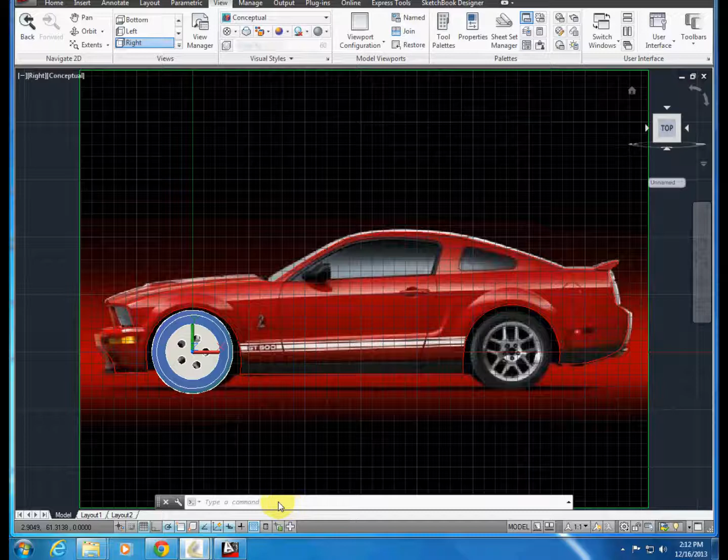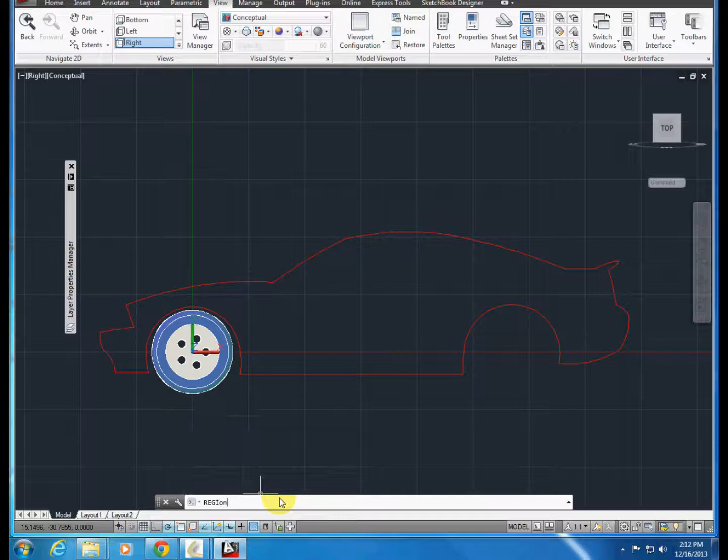First thing we'll do is open up our layers and get the side view, and we'll select each of the line items we've made. We'll type in region, then select everything here, and if all the lines are put together, you will see a solid object.

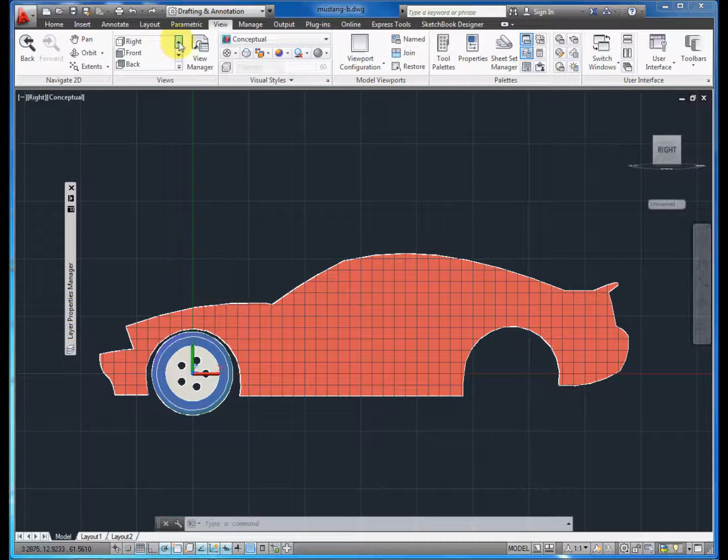In the view, we want to make sure we're seeing this in conceptual or shaded view, then look at it in 3 dimensions. Now the reason this worked is that all the lines were on one plane. If you have objects that are not on the same plane, it doesn't work.

You don't need to move this, but I'm moving it so I can get an idea of what it would look like. You're probably better off moving the wheel than the side of the vehicle, but you want to make sure you know what the right side and left side of the vehicle is in relationship to the tire and the wheel.

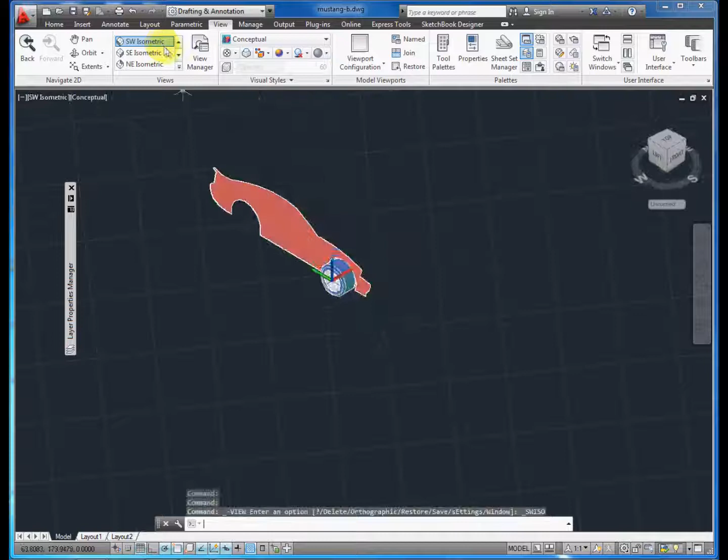We want to make sure the midpoint is selected. What we're going to do is make the width of this vehicle. I'm going to draw a line, and it's going to snap near the rear of the car, and in this case I'm going to type in 60 inches. Now you can always scale the wheels in the vehicle to make it fit.

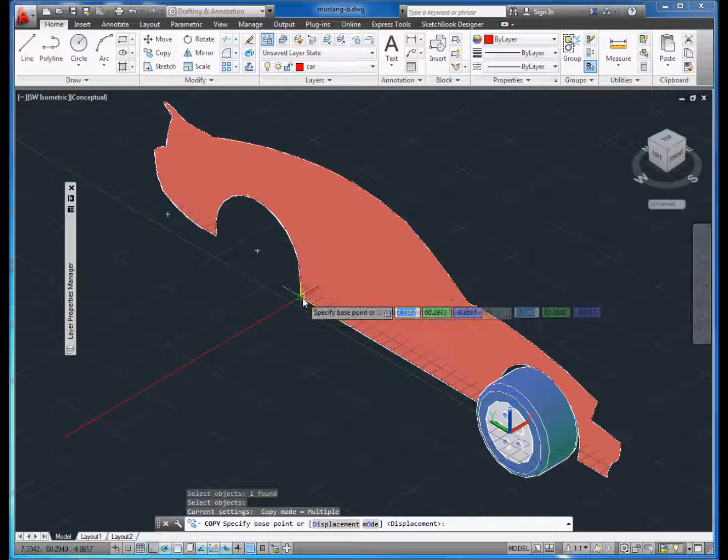So now what I'm going to do is copy that side of the car that I regioned, and I'll simply hit copy. Every time I select an area where it's going to go, it'll snap to it. The first thing it asked me was to select where I wanted to copy it from, and then it just pastes it there.

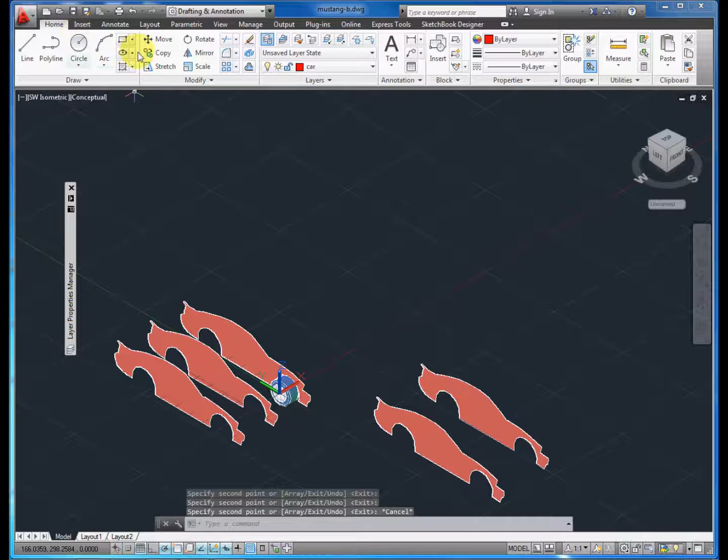So I have a couple extra here. You really only need one extra in this case, but you should see 3. The most important thing is you see 3 of those objects, and they should be in a pancake - they must be in a separate point along the axis.

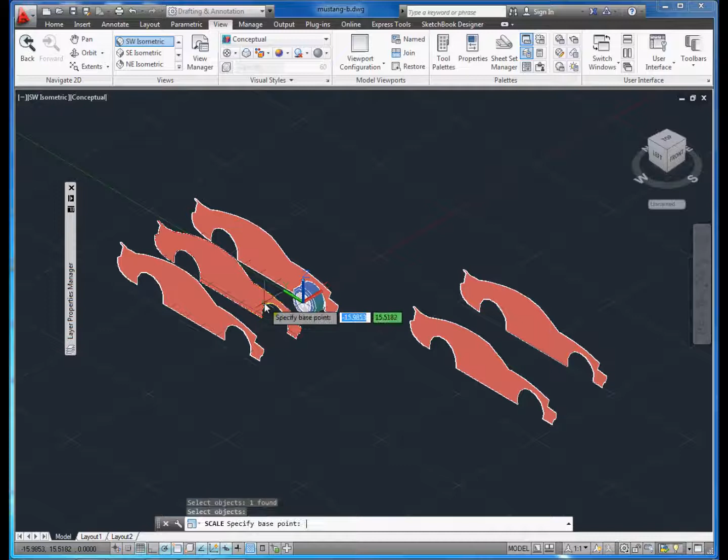Then what we're going to do, it's really important, is scale the center of the cars that have been regioned. I'll select it from that base point, press enter, and scale it 1.1, so it's a little over 100%. You really don't want to get too much more than that.

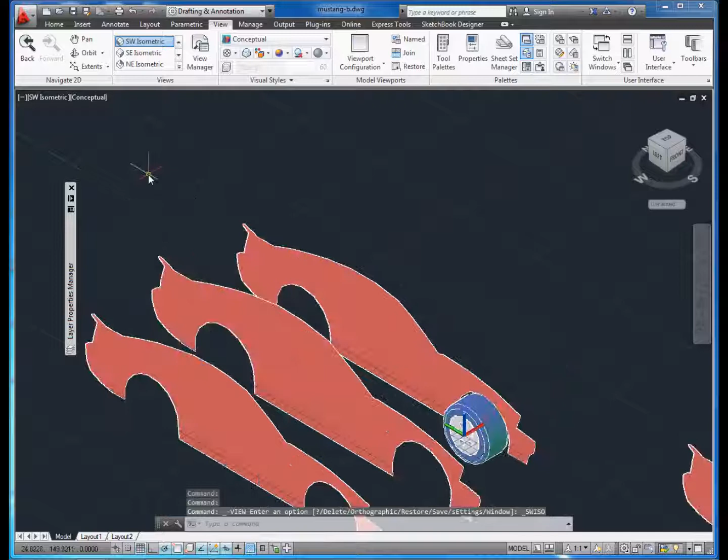That might actually be a little bit too much, but you'll notice it's bigger than the objects on the left and the right of it. Make sure you're looking at this 3-dimensionally, otherwise this all won't work.

Now what I'm going to do is explode, so I'm going to unregion these objects. There are icons in the ribbon you can use, but you can just type in explode, and that frees everything of its parameters. So now they're back to the individual lines.

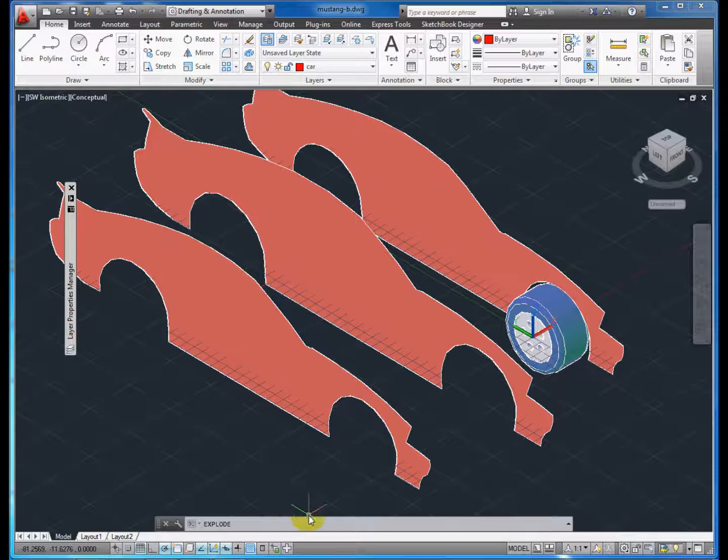So now what we're going to do is make a single object out of all 3 of these lofted objects in these points.

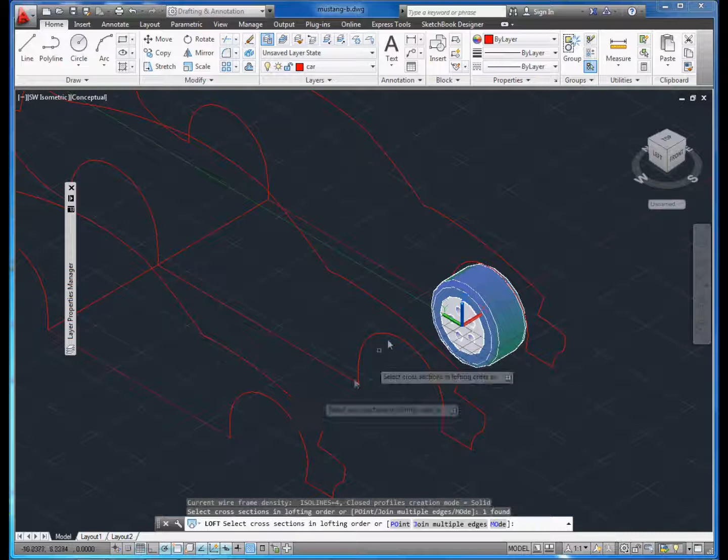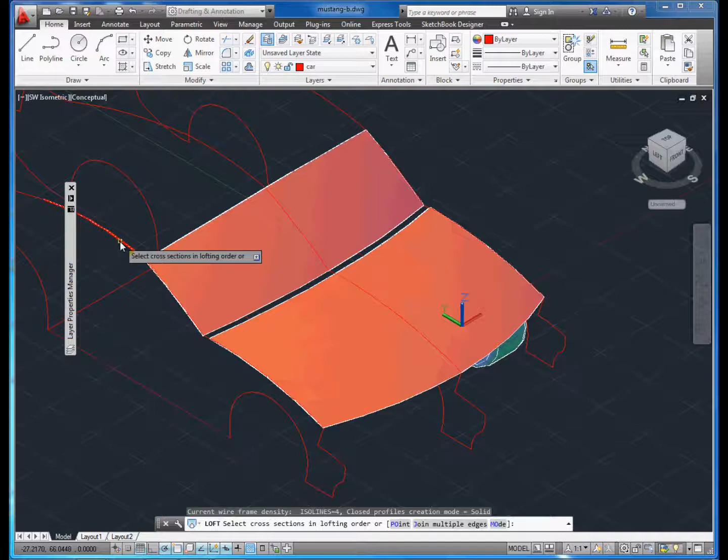So what I do is type in loft, and select in sequence the items I want to see. I press loft and hit enter 3 times. The first 2 are the loft; the third one actually just starts the entire sequence of the loft again. So you type in loft, then enter 3 times - the first 2 will do the loft, and the third time you hit enter, it just redoes the loft command, or whatever the previous command was.

So I have this. Now, you don't need to do this right now, but I'm just showing you with a glass - that window - that's why I wanted that to be one piece, because that is going to be the glass. In the rear, this is also going to be the glass. I'll press enter 2 times, and if I want to continue on, I just press it 2 more times.

So let's go ahead and make that glass. I select the object, which is the rear window.

And then in the layer command, you just click onto the glass, and it should just make the glass. Now the thing is, we obviously want to select off the glass as we start the new one. Otherwise, the rear of this car will be glass.

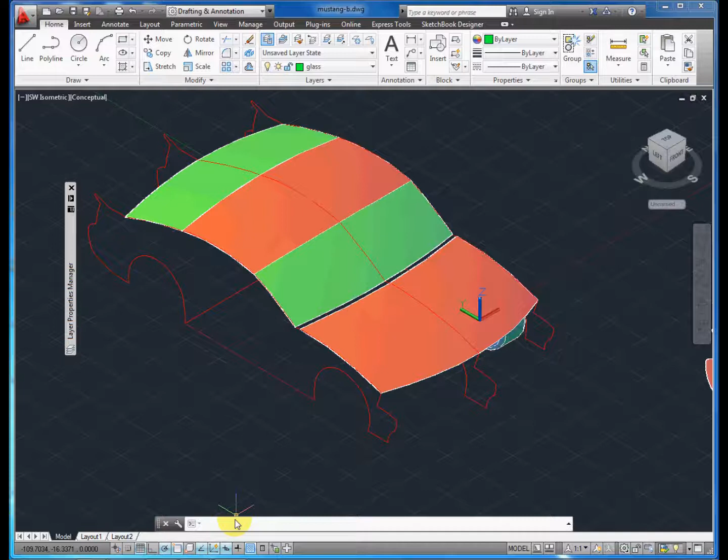But let's go ahead and type in loft again, and select the rear of the car. Now remember, if it's the hood, there's 3 of the hood. If it's the back trunk, 3 of the back trunk in sequence from outside to the middle and to the other side.

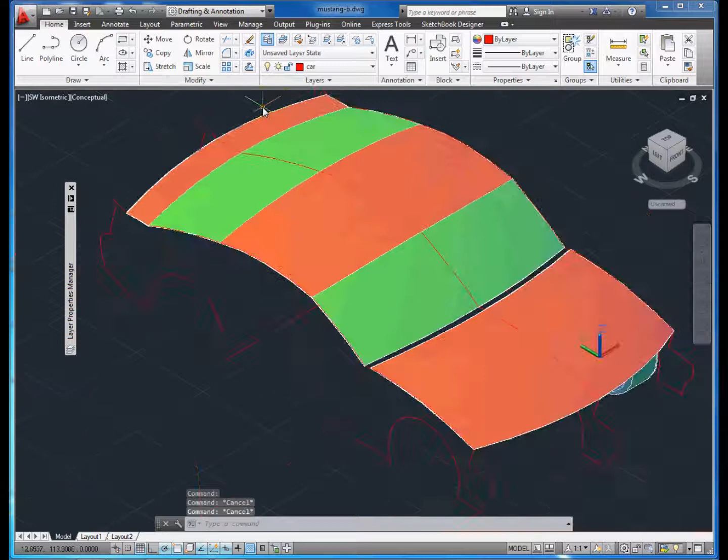This should actually go fairly quickly for you as you start this. You just want to be looking, and I'm going to use the orbit as a great tool to be able to rotate around and look at this. Then I'll go ahead and type in loft again and press enter.

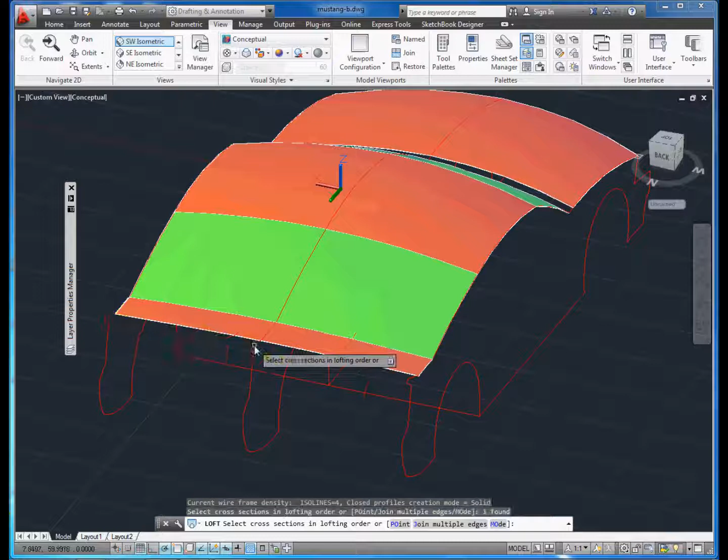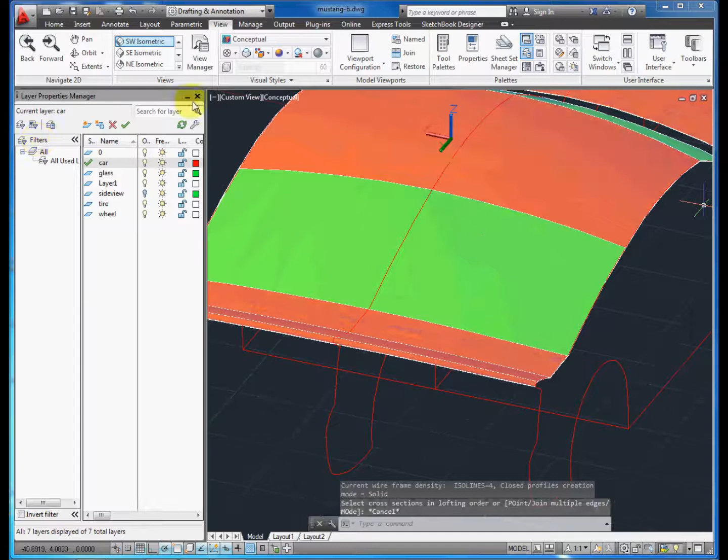Select the objects and then press enter 3 times. You want to inspect it as you go along here. Making sure this is all in the same layer. Then I'm just going to systematically go through this and complete this portion of the project.

So loft 3 times, select the objects, and keep going around. Select loft, press enter, select the 3, and then hit enter 3 times after you're done. Again, you're going to need to be rotating around this object so you get a good vantage point of this.

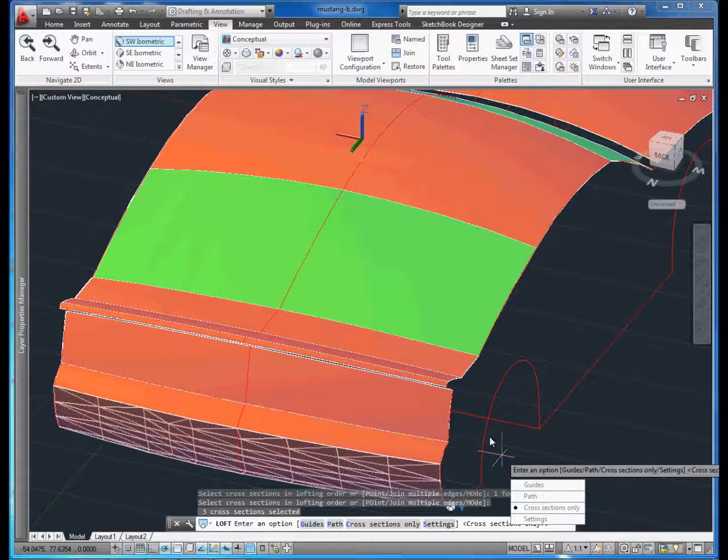One of the things we don't necessarily want to do is loft those wheel wells, for example. If you look at a traditional automobile, those aren't generally going through the entire car. But I do want to do the part of the undercarriage. And looking at this, this is that back of the wing.

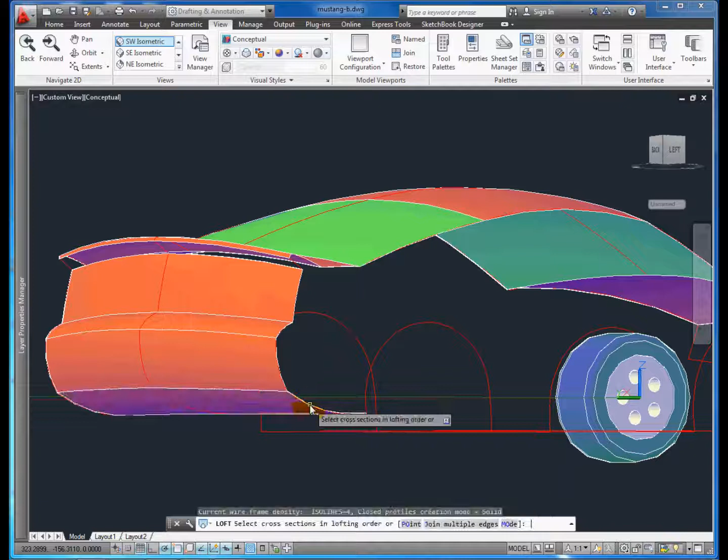The nice thing is the object becomes much more supple. If we had done an extrusion on this, it would just be a straight line. So with the loft command, you might want to play around with it as you go along, because it does give you different types of options.

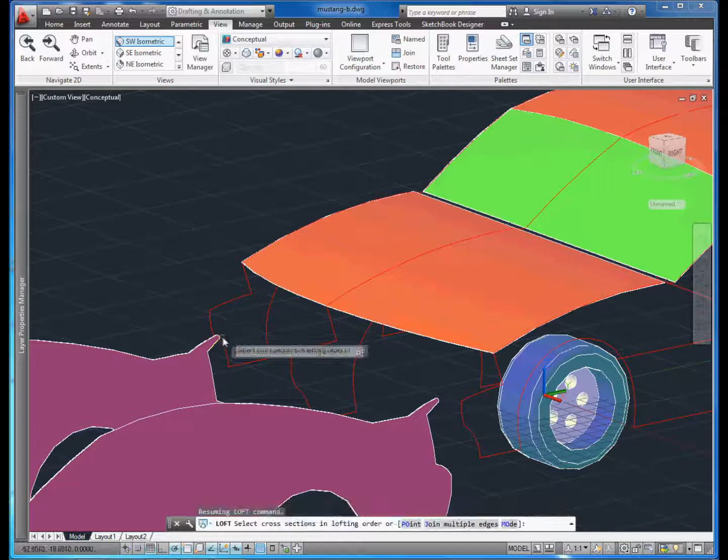I'm just simply scrolling in with my mouse as I do this. And these 2 vehicles are in my way, on 2 sides. I'm just about done with this portion.

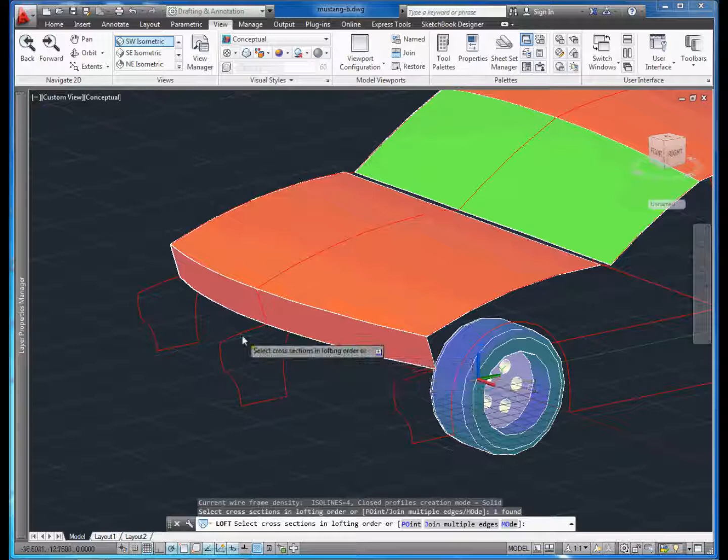I notice the front end is a little big, this bumper, and that's probably because that's where I selected when I selected the portion where I copied, it was more to the rear. But typically the front has a little bit more bow than the rear of the car.

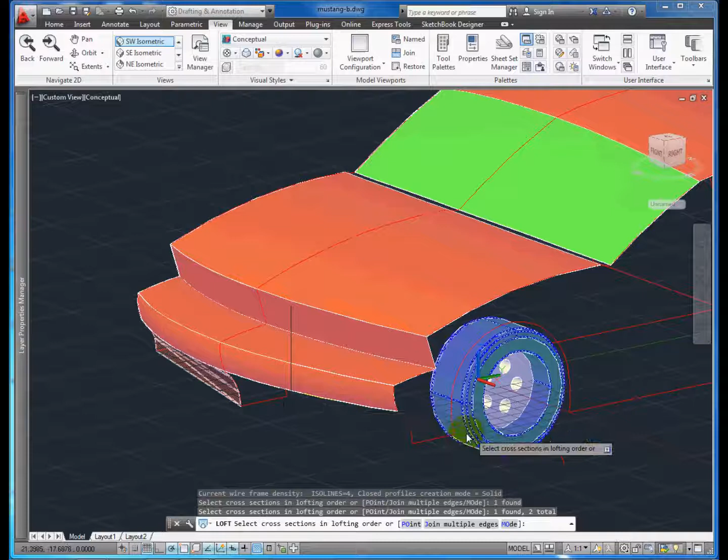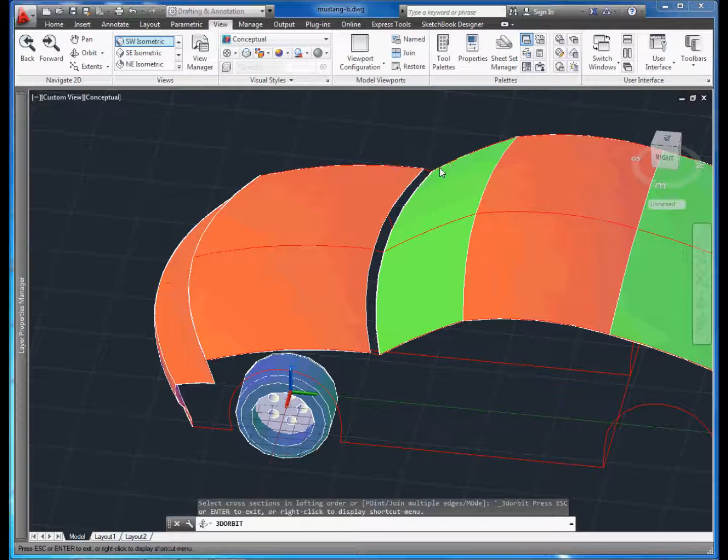All right, so inspect it over, make sure that the vehicle has been regioned. Now what we want to do is transition here to the side of the car after we get this last little piece here. Goes very quickly.

All right, so let's get back to our view here. Go to the right view. All right, now you can see it's looking more three-dimensional. All right, so there's a couple things we're going to need to do here.

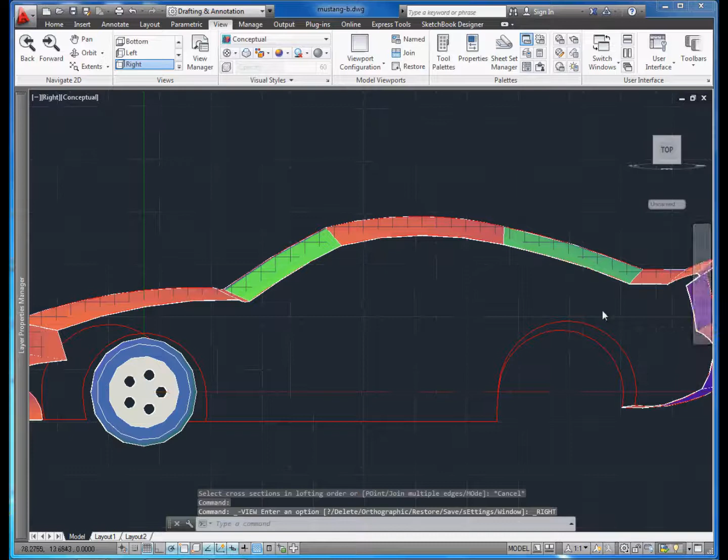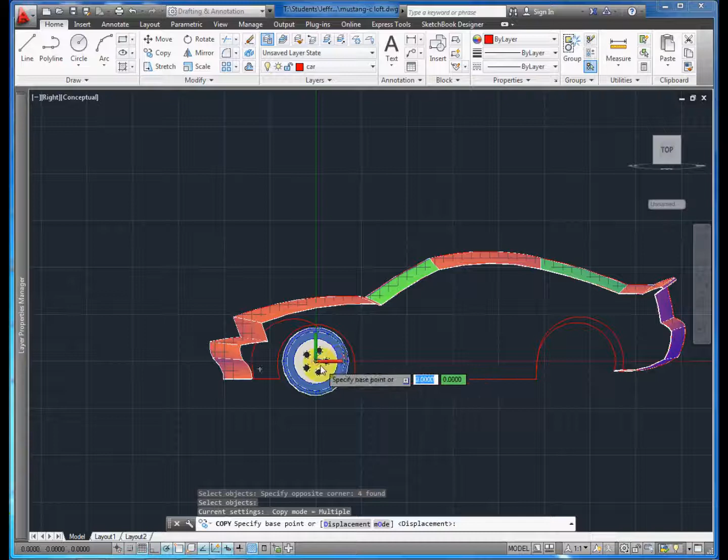So let's first of all copy this wheel. I type in copy, and I want to select it in the center of that wheel well. And if you notice as I move it, if the settings are done correctly, you'll see a line that it moves across, just straight across.

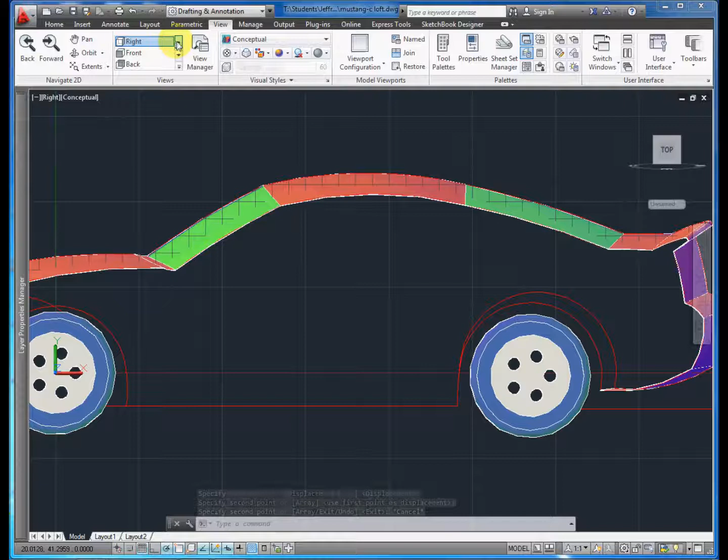You can also, if that's not working, with the wheel wells, it'll show you the center of it, but it's usually easiest to just go straight across. That way it doesn't snap to inadvertently. All right, so we can see it's not exactly where we wanted.

I'll just simply type in move, go from the bottom left. If you go from the bottom left up, it'll select the pieces, the components that you haven't quite hit. So I go from the bottom up, press enter, and then I can move it in. I have to be very careful with a snap line because I don't want to be snapping this to an area where I don't want it to be.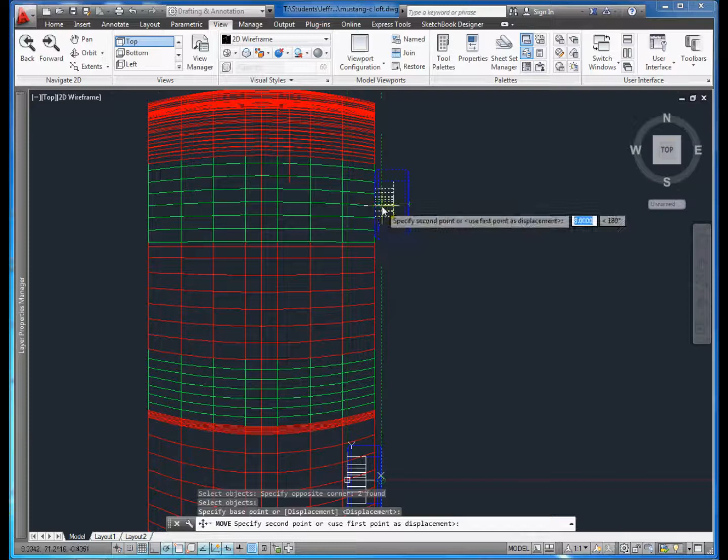All right, so that looks pretty good. Okay, so inspect the car. It should be three-dimensional, and we've finished lofting the vehicle.

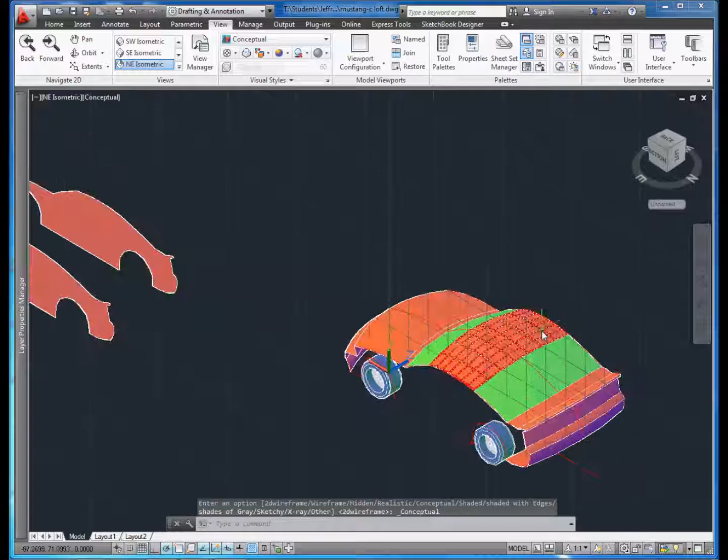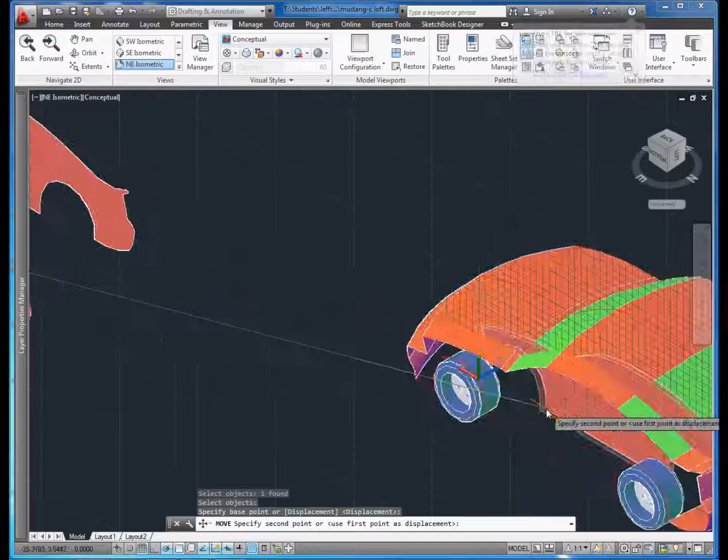And we're going to get back to the right view here at the end. Let's go ahead and move this aside. We'll snap it, and we'll just finish building this. And you know what? I'm not going to use this last piece here. It'll probably be easier to go ahead and just do the work that I need for the windows and then copy it over. So this is a good place to stop for this lesson.